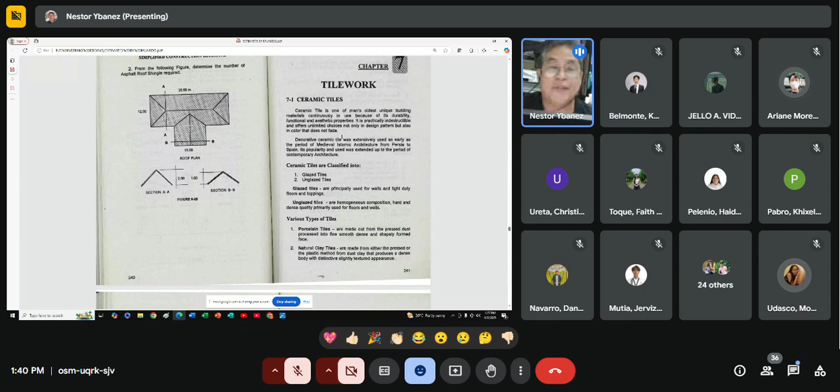That's why I ask you to go to the different hardware stores so that you are familiar with the different materials for construction, and you can also find the location of hardware stores because whether you like it or not, this is part of the work of a civil engineer.

You can get so many things, so many lessons out of going to the hardware store by just getting the prices. You will familiarize yourself with the different materials there, not just focused on your assignment. If you are observant enough, you can go around, there are many materials there. I want you to also take the opportunity of going around the hardware store to see what materials are there and ask the people there about them.

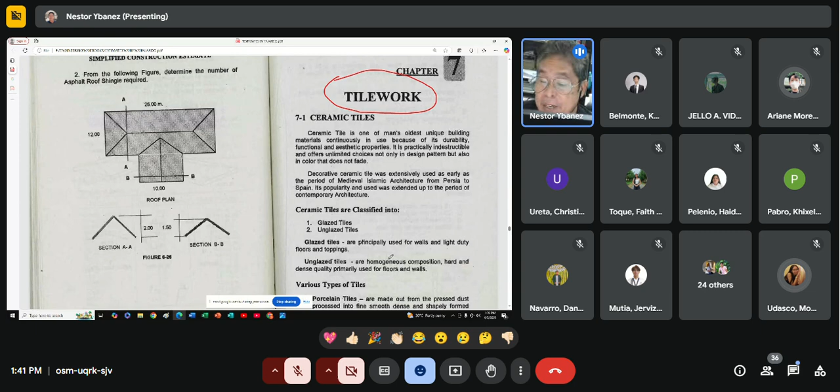I don't know what you did, maybe some of you went straight there, but if some didn't, that's their own lookout.

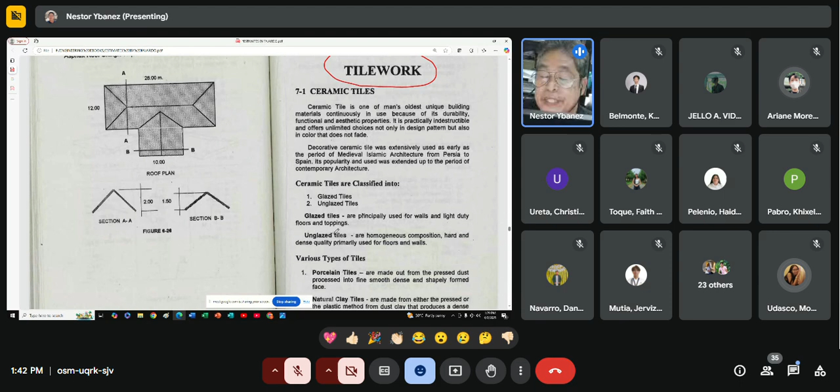Okay, so now, glazed tiles are principally used for walls and light duty floors and toppings. So principally used for walls.

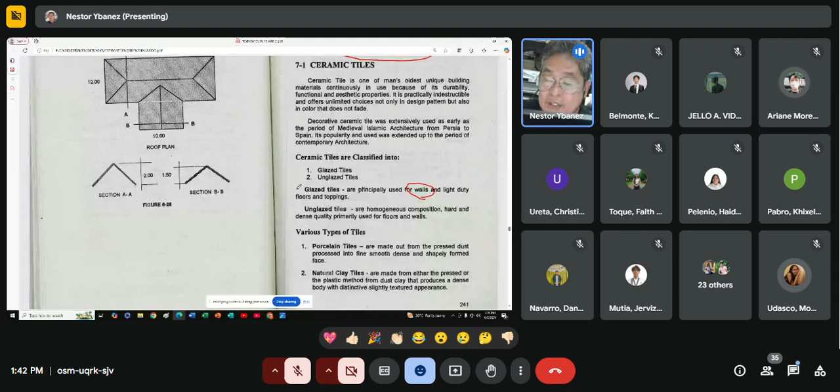There are various types of tiles like porcelain, natural clay tiles - some expensive, some cheap - ceramic, quarry, and faience mosaic tiles.

Anyway, that's not our main focus. Our focus is to determine the number of this kind of tile. I will just introduce them to you, and knowing more deeply about them is left to you.

There are also special purpose tiles that are non-slip, especially for the CR or in areas where there's a lot of water, so the tile needs to be non-slippery, not shiny. So that's the appropriateness of the different materials to use.

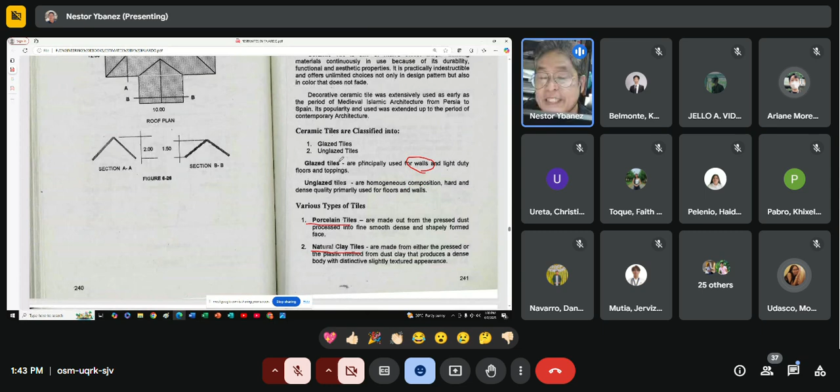So in estimating the number of tiles used to cover a certain area, it's very, very simple - simpler than roofing, because it's just merely getting the total area to be covered with tiles.

Then divide it by the area of one small tile, and you will have the number of pieces of tiles that will cover all of this area. In order to learn that, we have this example, illustrative problem.

So as a flooring, the dimension of the floor tiles is 20 centimeters by 20 centimeters, while the wall tile is 10 by 20 centimeters. So this is the area that will be covered with tiles.

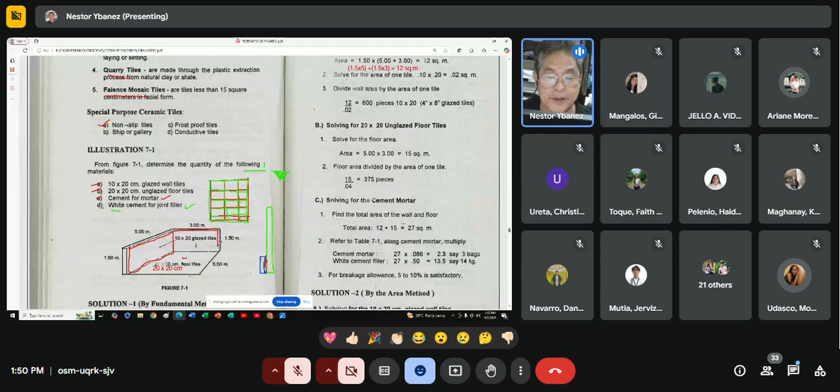So 1.5 times 5 plus 1.5 times 3 equals 12 square meters. If this is 1.5 by 1.5 times 3, that's not the area - the area is 1.5 times 5, and the other wall area is 1.5 times 3. So the total area is 12 square meters.

For the area of one tile, the tile used here is 10 centimeters by 20 centimeters - that is 0.10 by 0.20 equals 0.02 square meters. To get the number of pieces of tile, divide the total area by the area of one tile, equals 600 pieces, which is 10 by 20, or equivalently 4 inches by 8 inches.

The way to specify this for purchasing is 10 cm by 20 cm glaze tiles. Okay, 600 pieces.

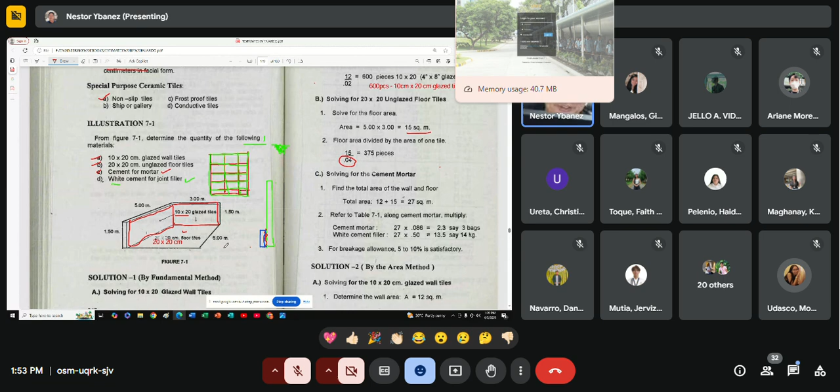Next is flooring. The floor area is 5 times 3 meters, so we have 15 square meters. Then the area of one tile is 0.04 - that's direct since it's 0.2 by 0.2, and 0.2 by 0.2 is 0.04.

So that's the area of one tile, 0.04, which is the divisor. 15 divided by 0.04 equals 375 pieces. Again, the specification was not included.

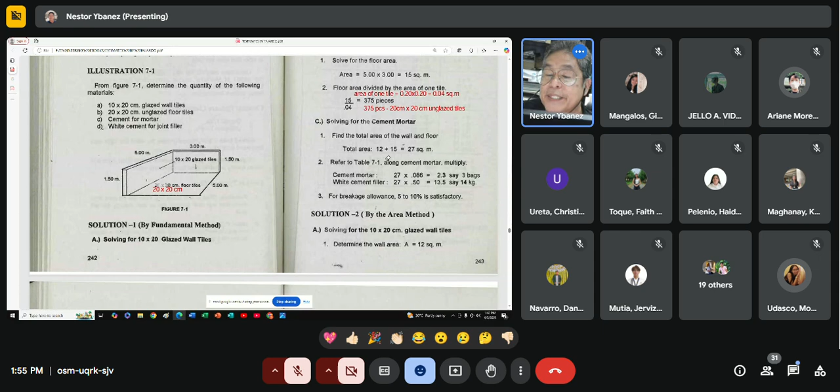The cement mortar total area acts as the binding material between the tiles and the wall or floor. The total area is 12 plus 15 equals 27 square meters.

Refer to table 7-1, for 20 by 20 tiles: quantity of tiles per square foot and meter, commercial size and pieces.

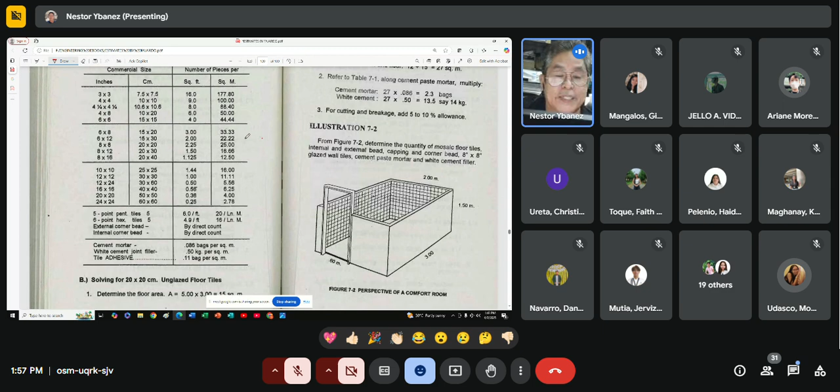For the white cement joint filler, multiply the area by 0.5. So the area is 27 times 0.086 equals 2.3 bags. And the white cement is 27 times 0.50 equals 13.5, say 14 kilograms.

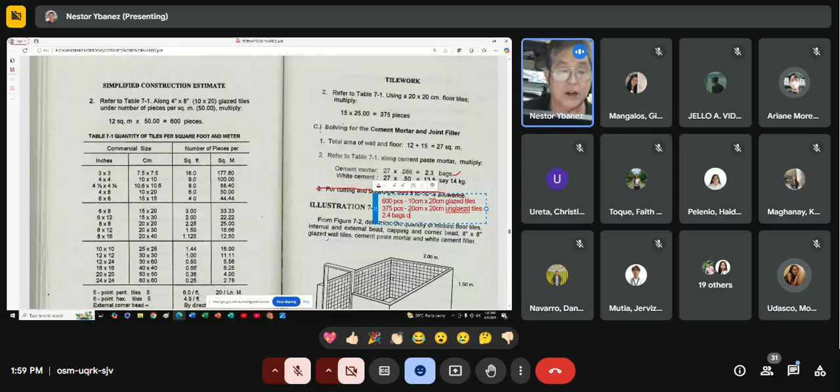2.4 bags of cement mortar, and also 14 kilograms of white cement.

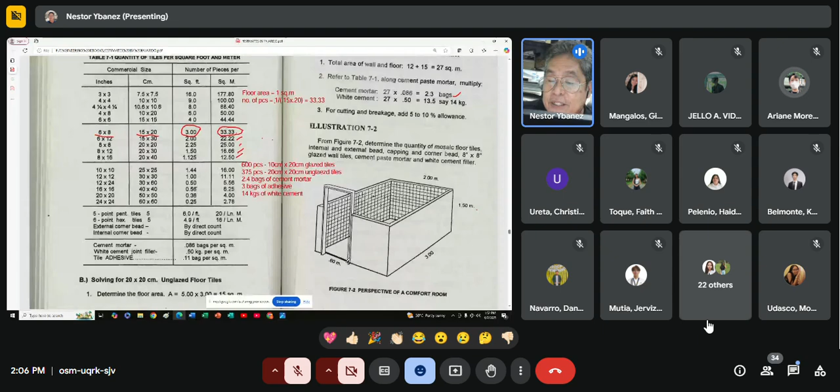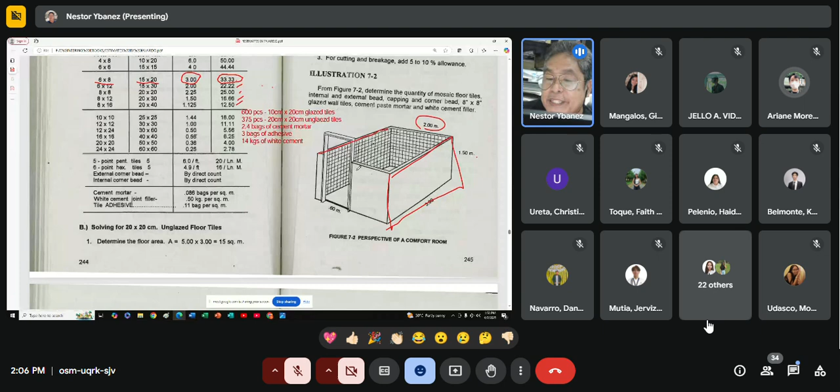Okay? So, this problem 7-2. Of course, it's common sense that if there's an opening, you subtract it. So therefore, for the wall, it's 3 times 1.5 times 2. This wall, 3 times 1.5. This second wall, therefore times 2. And then the wall is 2 times 1.5, one. And then this one, 2 minus 0.6 is 1.4 times 1.5 and you have the total area.

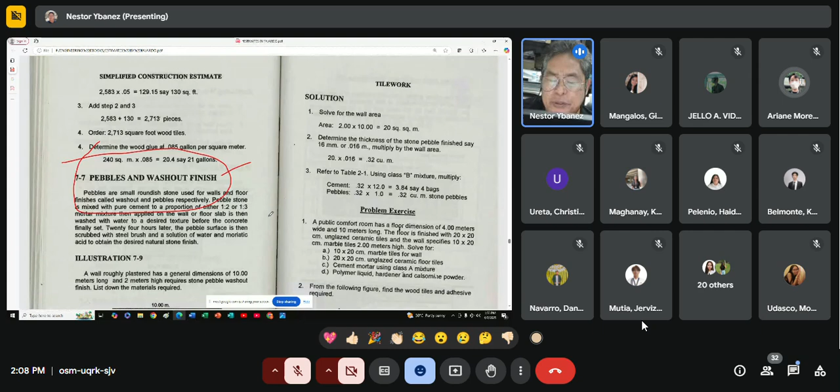So we have to go away from those types of materials which are not used anymore. Okay, now, if the area to be covered with tiles is not regular, do not expect that all are rectangles or squares. That is very elementary. It doesn't provoke critical thinking. 10 times 2 divided by 0.2 by 0.2, you have your answer. You can easily get that. What about another one? Geometric shapes, so let's look for geometric shapes to make it clear.

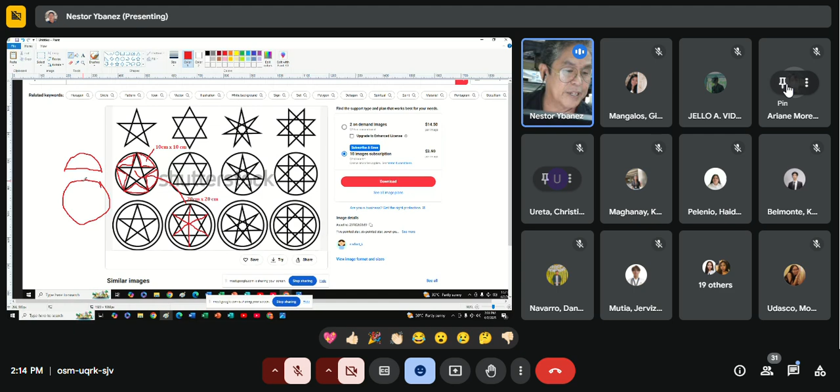Do not expect that all are rectangles and squares. That's very elementary. What about a semicircle? Or a circle, or a sector? How do you get the area of a sector? So that's very possible. These scenarios are possible. That's not impossible.

Determine the area. Try this one. Area of a circle is easy: pi r squared. Okay. Then I find an area of a five-pointed star in a circle.

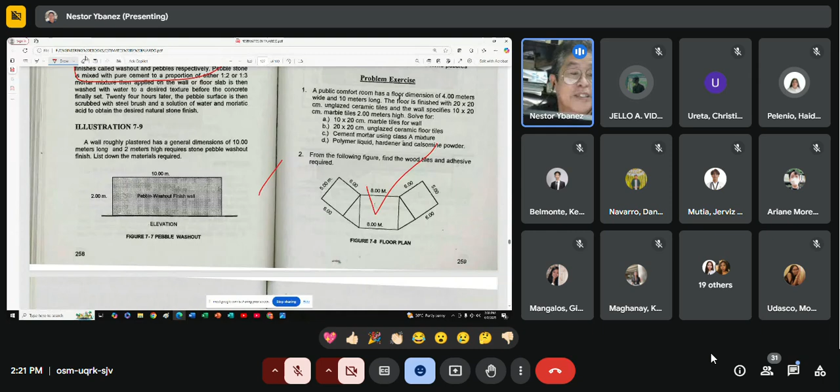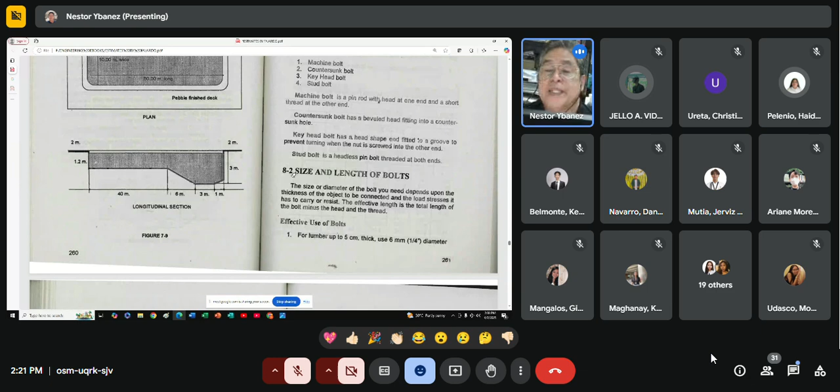Basta mo na to, total area divided by area of one tile, and then you have the number of pieces. Ano yun siya? So, ang pagpagitan na kung ang area rectangle ba or square or whatever, then dali na.

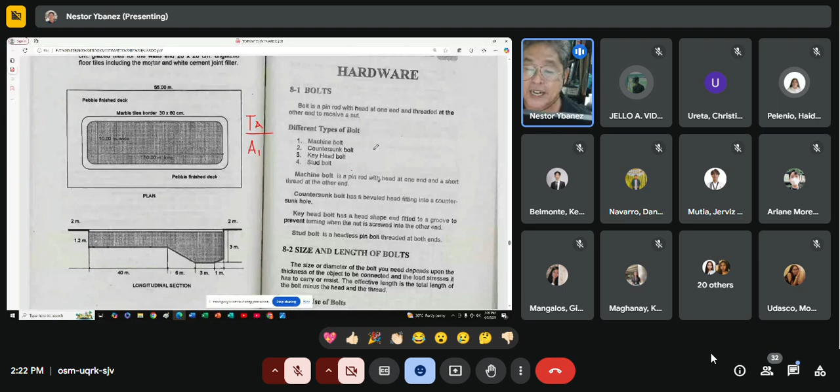Okay, kining hardware, bolts. So, dili na kayo sa problema kaya it will be direct counting. So, pila ka bolt ang ginagamit, just count. Like this one, pila ka palit mo. So, count lang siya. So, by diameter of bolts, and then we will not really stick to this because there are new diameters existing these days, and there are diameters that are being phased out. So, ang importante nga kabalo ta na naa sa table according to the diameter and the length of the bolts. So, they come in this form, diameter and length.

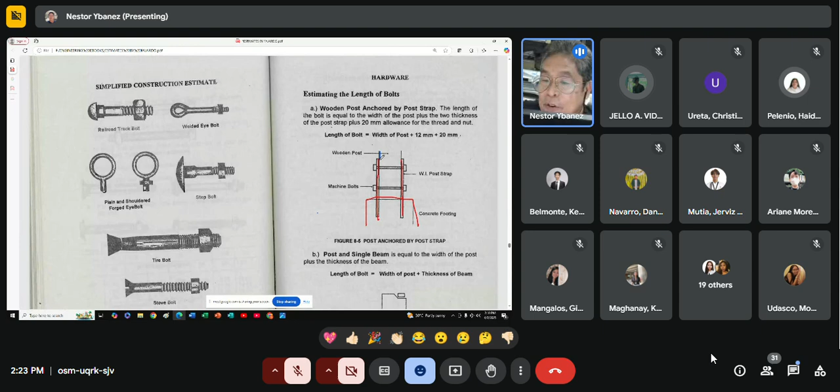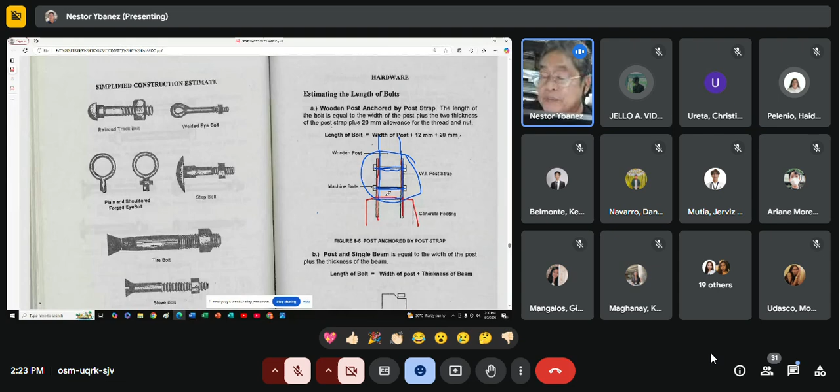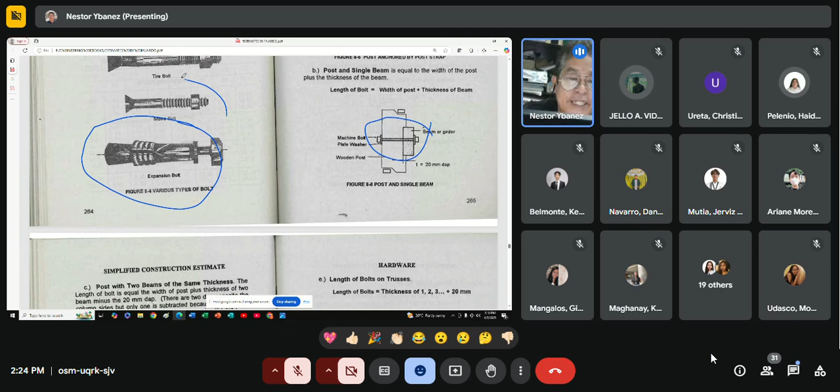So, pagpatong butangan na duha ka bolts, aron di siya mutuyok, tindog siya. So, kung pila ka columns, if there are 10 columns na duha ka bolts, so 20. So, it's not really difficult for counting the bolts. It's just direct counting. So, mao na ang pagtrabaho sa bolt. But then, as I said, may mga bago karon. Sa bolts and screw.

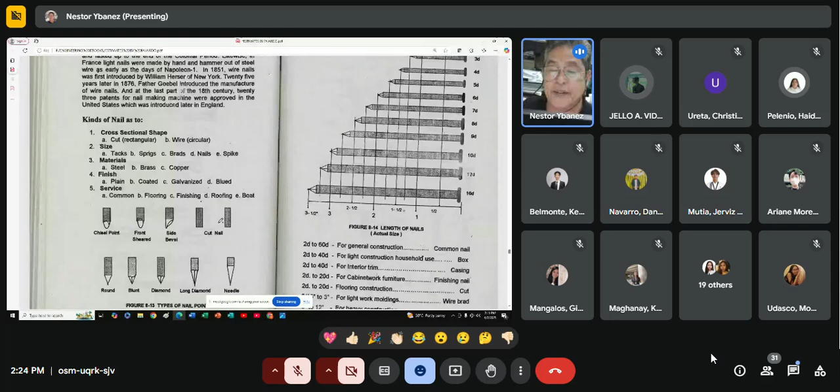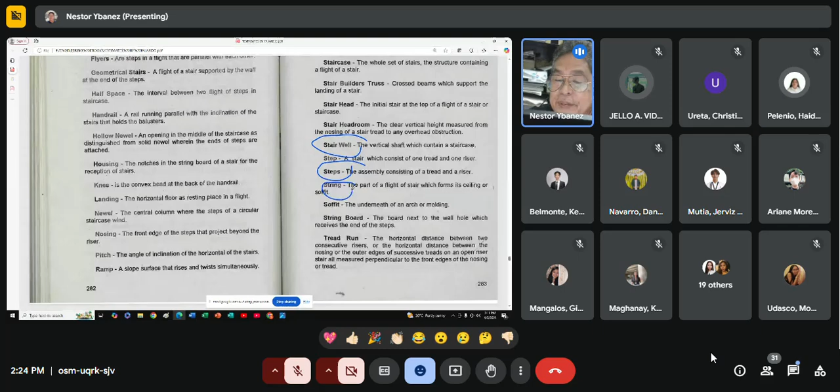Sometimes, kung ayan mga different definitions, so ang staircase like this one. So, if you will not use kining kahoy, wooden for steps, then concrete ra atong pag-compute. So, concrete, class A, class B, class C, class D, and just get the volume of this stair, then on class A multiply by 9 for the cement, and sand multiply by 0.5, and gravel multiply by 1.

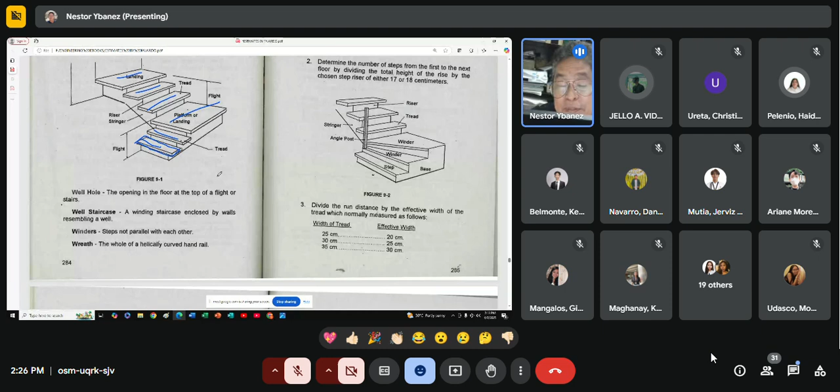Kini, wooden siya. Kini ang mga steps or tread is wooden. But if it's not wooden, kung concrete tanan, just solve for the volume of that. Volume of this, and then i-multiply ko unsa nga klase sa mixing ang gamiton. Mao na siya.

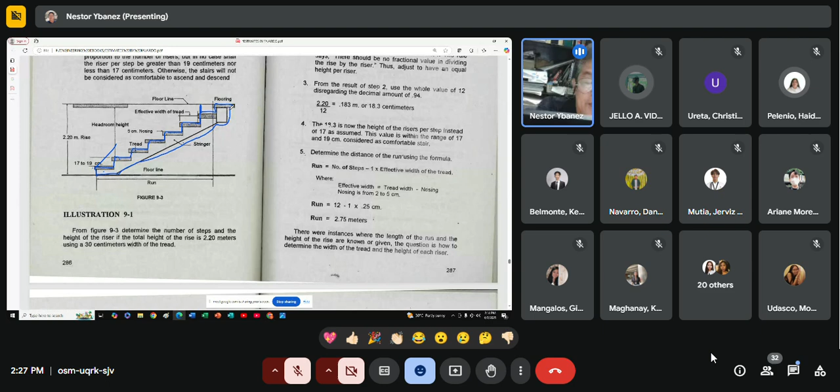Wood, sige, 2 by 6 by, let us say, 5 feet, or 4 feet na lang. Meaning, 2 by 6, and ang length nito is 4 feet. So, 2 by 6 by 4 divided by 12. So 4 board feet per step. So 1, 2, 3, 4, 5, 6, 7, 8, times 8. So 32 board feet ang imong gamiton for the steps of the stairs. Nice.

Okay, for painting. Ang painting comes in a form na ay mga particular coverage, for example, 1 gallon covers 10 square meters. Pasabot ana, ang isa ka galon na pintal imong paliton, makapintal na siya og 10 square meters. Mao na ang pag-estimate sa pintal.

Karon, if you have 125 square meters, how many gallons of paint are you going to buy? Pila? Can I have an answer? 12.5, sir. Oh, so 12.5 gallons ang imong paliton. But then, wala may 0.5. Ang imong paliton is 13. So 13 ang paliton.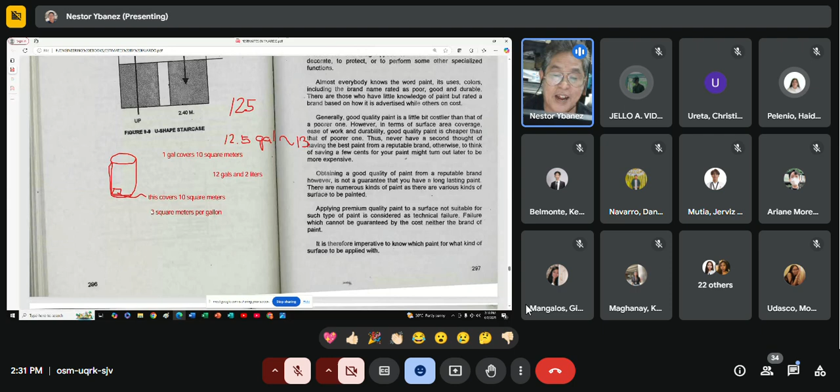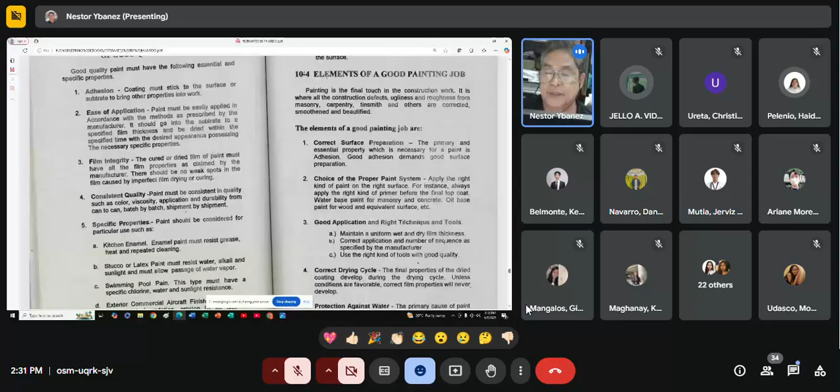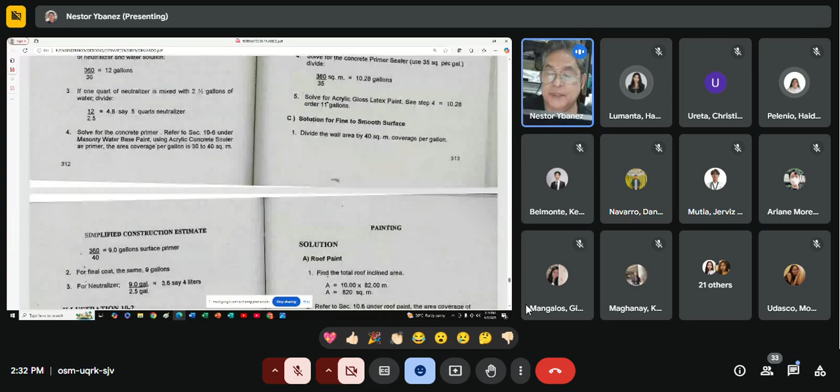Oh, on the elements of good painting job, that's not our work. Work na sa painter. After sa painting, ano na.

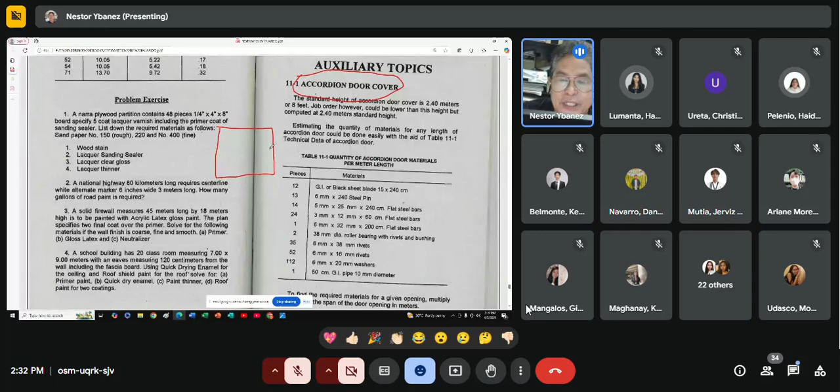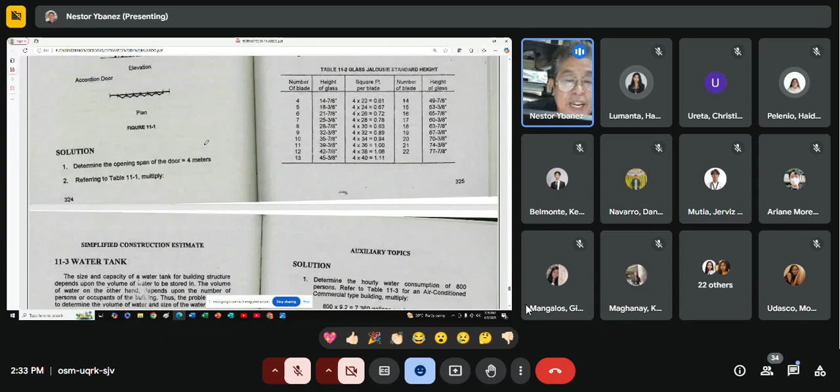Okay. That is accordion door. That is named after the accordion, which is a musical instrument. Then, ordinary accordion, roll up and roll down, no? Roll up, roll down.

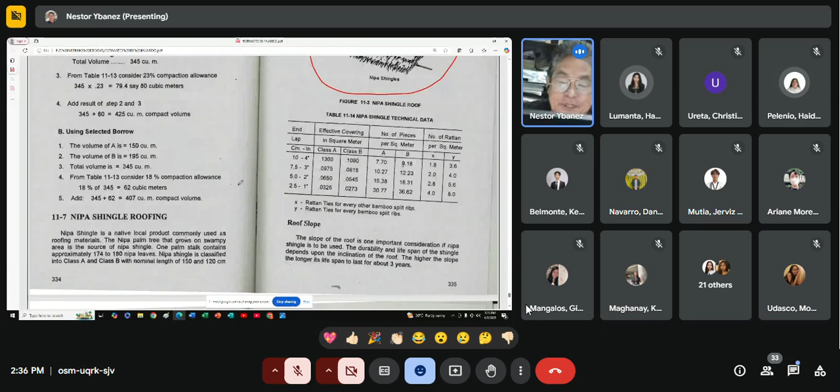So ang atong quiz, tiles, scaffolding and roofing. Okay, so timanin na itong mga side lapping and end lapping. The scaffoldings of the table. So, mahuman na ang libro and we will proceed to another materials. Okay, question. Where are you?